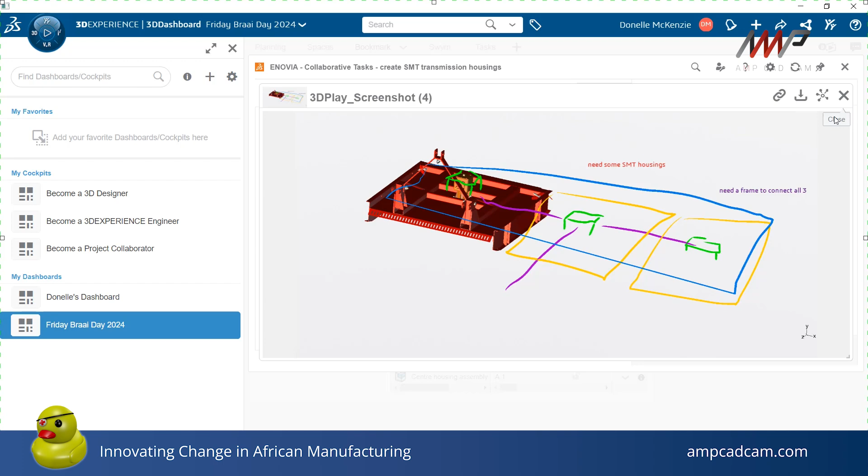Just as Jason drew it, I can see the full image and his little notes that he's attached over there. My job, as specified in the task, is to do the sheet metal housings for each little motor. So I can pop back to SOLIDWORKS then and begin creating the sheet metal that was tasked to me.

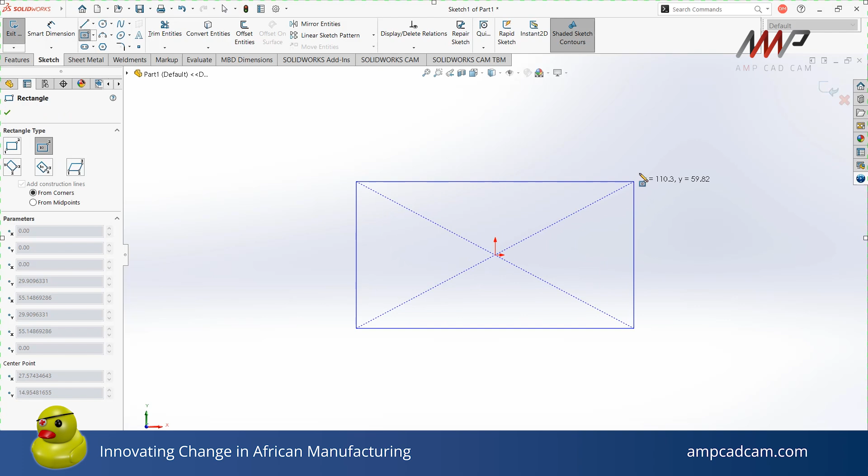So I can begin with a base flange tab. I'm going to do that on the front plane and start with a little rectangle like that, give it some dimensions, and I would like to set the thickness for this. It is already at 1 millimeter, which is what I would like it to be.

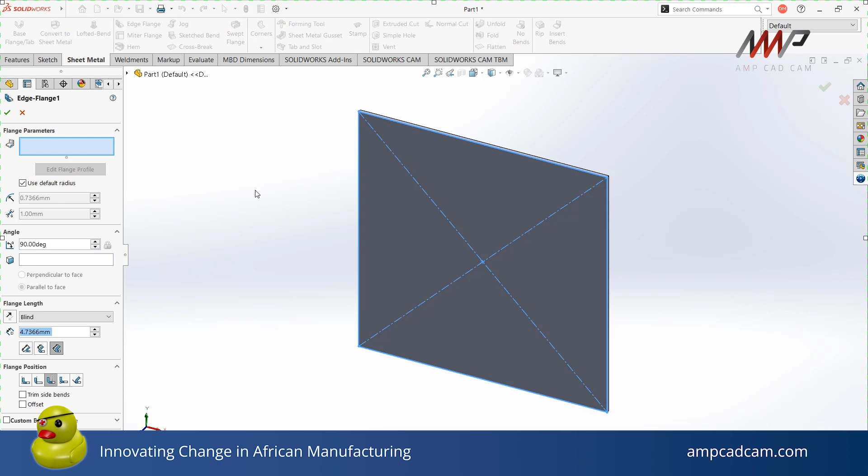Now I can go ahead and add some edge flanges to the base flange. So I go and select the specific edges which I would like those flanges to come off of. 1, 2, 3, 4, like that. Let's give that a specific height, and I am happy with that. I can click OK.

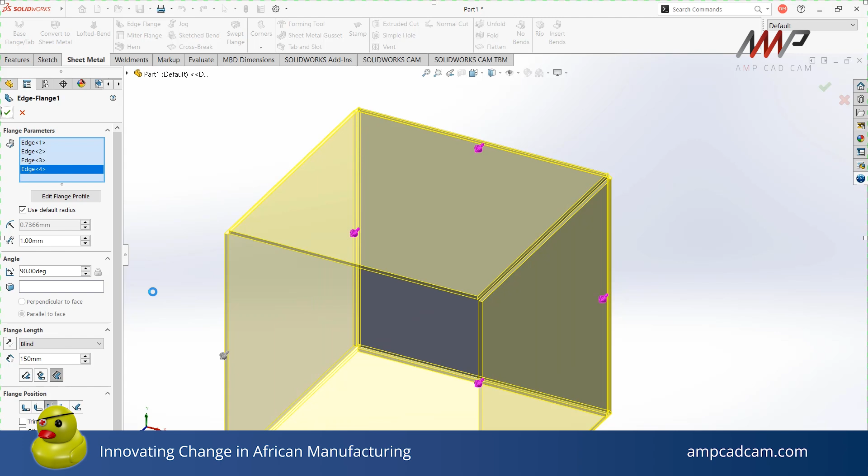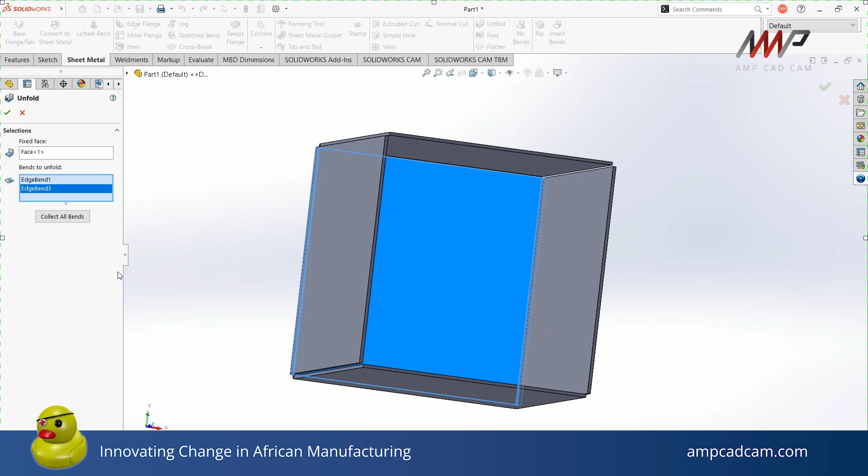So now my box is about halfway there. I just need to do some cuts on the base flange and on the sides of this box. So I will then unfold, select my fixed face and the bends, and unfold those parts that I need to do some cuts on.

I'll create a quick sketch over here. I need a circular cut for the shaft over there.

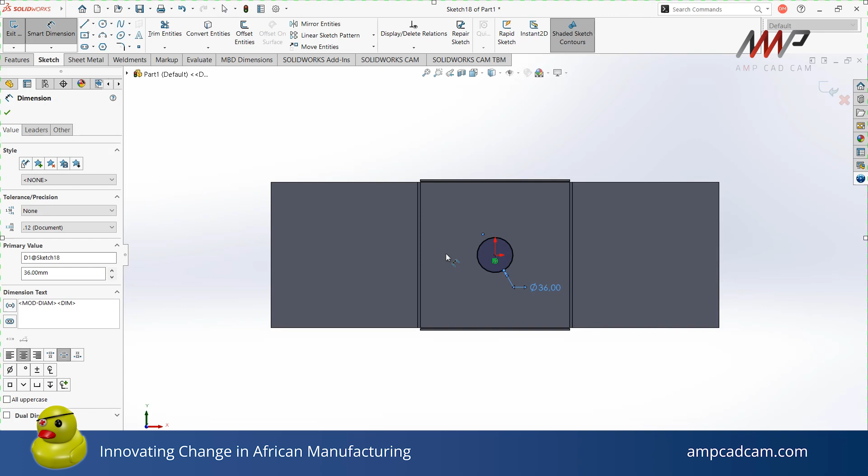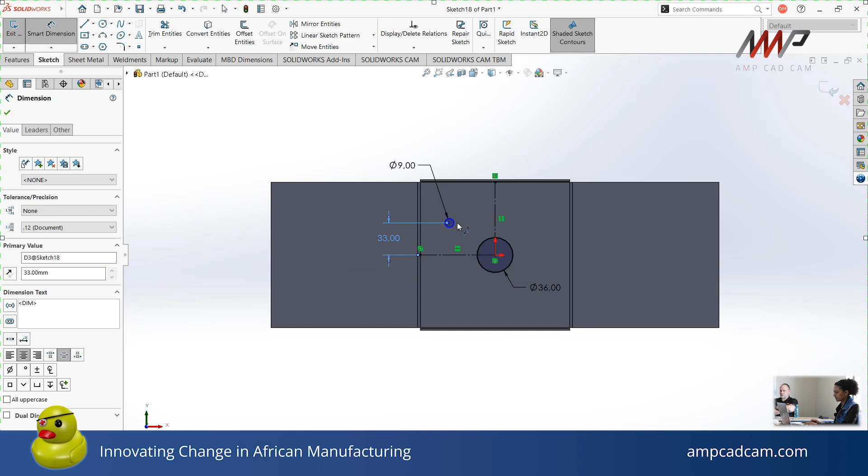So I will be using some diameter 8 bolts. I'm just going to make this slightly bigger and set that to go all around in 4 directions, like that.

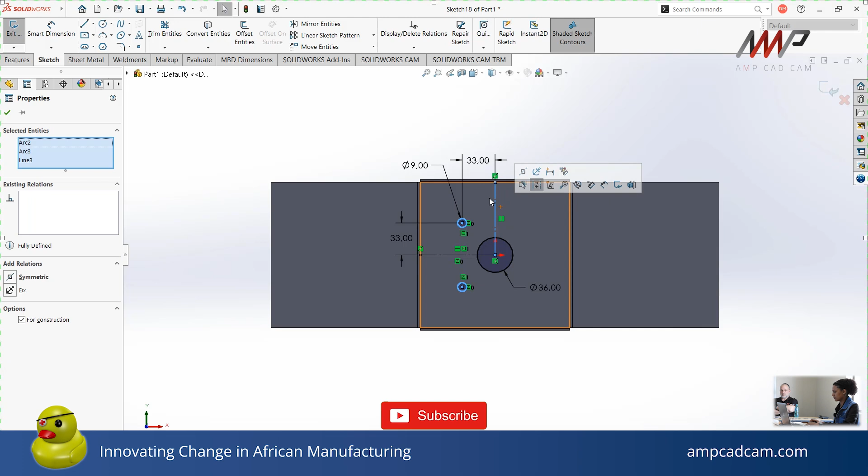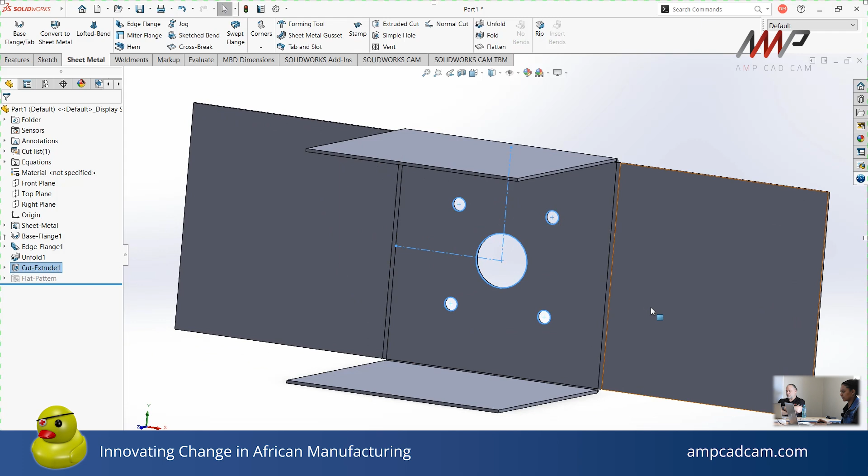And there I have my sketch. So straight from there I can do my cut extrudes, and I will make sure that it is linked to the thickness of the plate, and I can click OK. So this will be the section that will fit directly onto the motor.

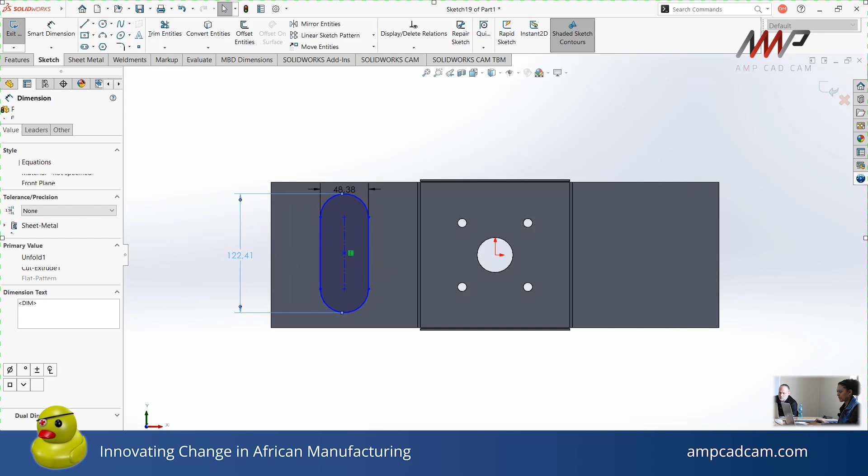On the sides, I would also like to do a sketch for the transmission that will be passed to the sides for the connecting bushes. So I decide I would like to do a straight slot over here just to accommodate the shaft that will be passing through, and let's give it a nice size so that it can accommodate any movement of the shaft in a vertical direction. Let's make that slightly larger than the shaft and just place it nicely over there.

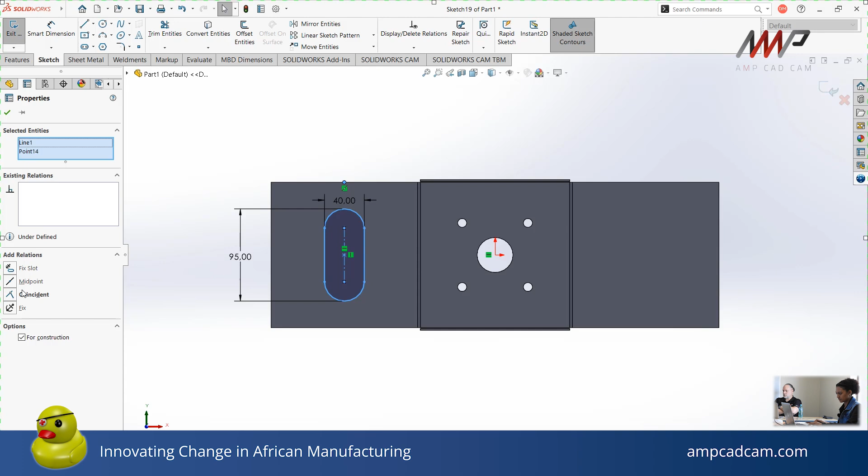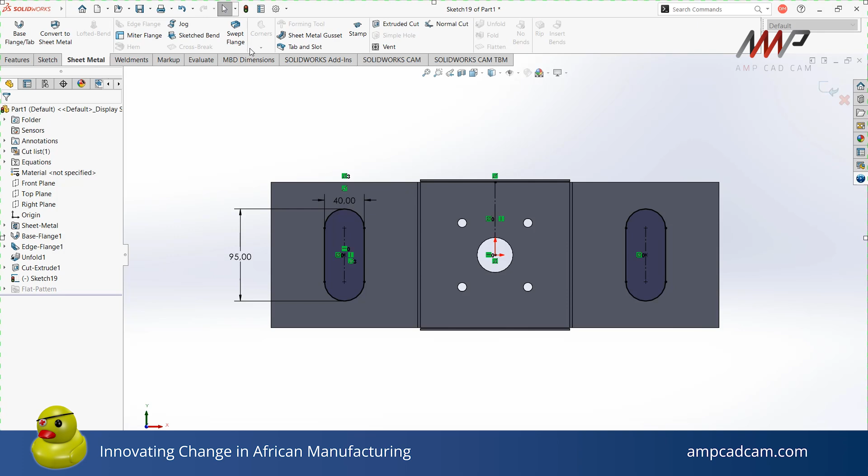There we go. Now I would like this exactly on the other side as well, so I will just mirror that over. There we have it. And I can do my extrude cut. Again, same thing, link it to the thickness of the plate, and there I have my cut.

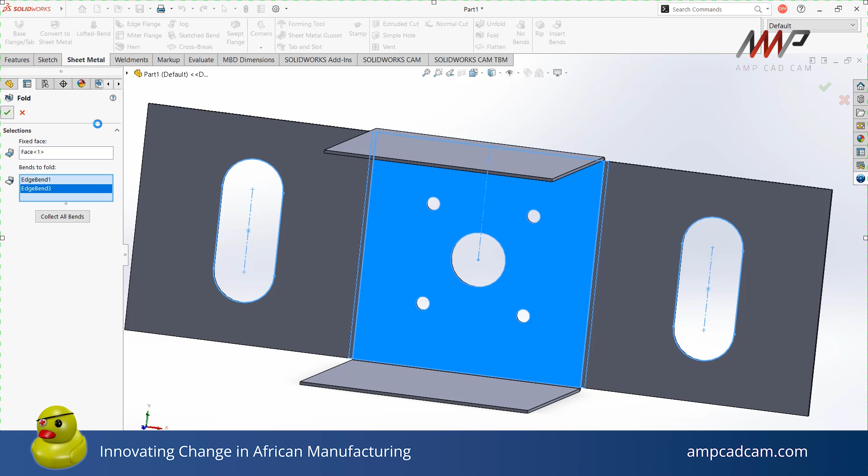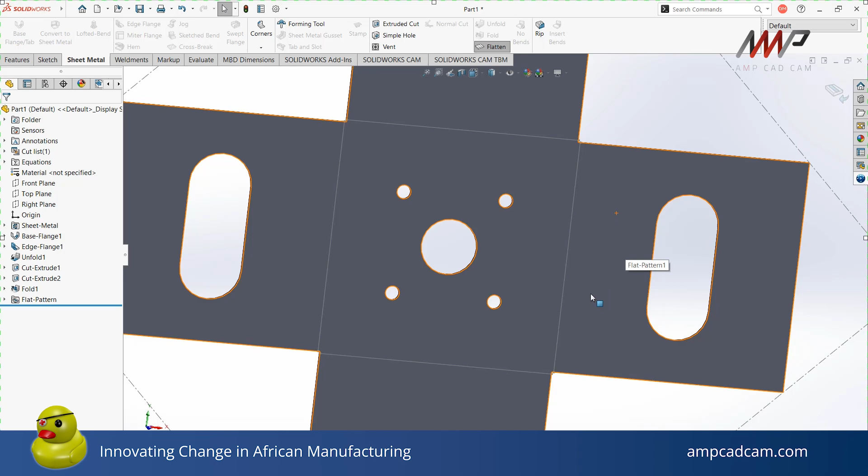Now I would like to fold that back again. And I decide this is going to be cut on the laser cutter. In order to do that, I need a DXF file, so I will flatten my part like this, and immediately I can export it to DXF.

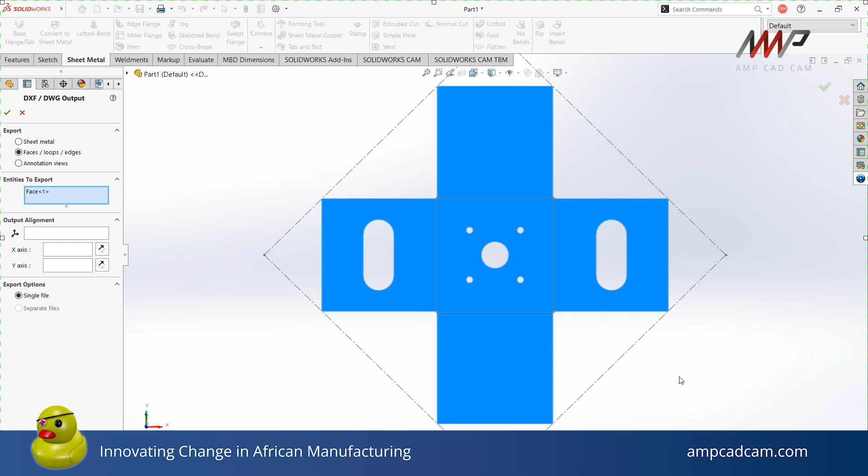I'll save this as sheet metal housing, center sheet metal housing, because I will have ones on the side as well, and save. Once I click on save, there's some settings that I need to add in there. So when I select sheet metal, it will ask me what entities I would like to export. I only want the geometry that I've created, and now I can click OK.

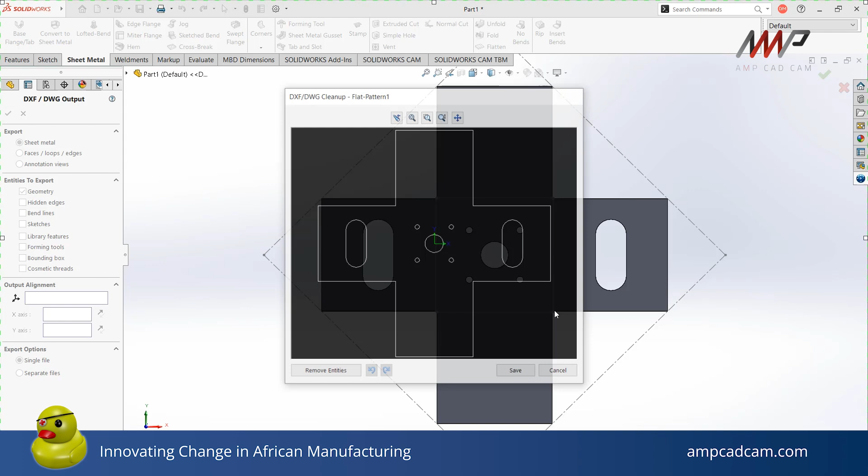Once I click OK, it will give me a small preview of what the DXF file looks like, and it will only be saved once I click on save.

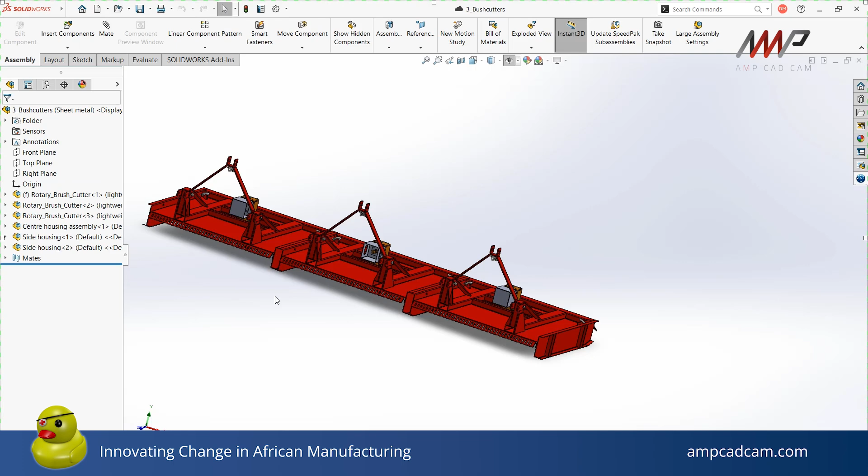So now my little creation is done, and what I will have done after this is to create identical parts, with the only difference being that it now has a front covering and it has the side open for the little side parts, and add a square plate over there just to fortify the space between the housing and the fasteners.

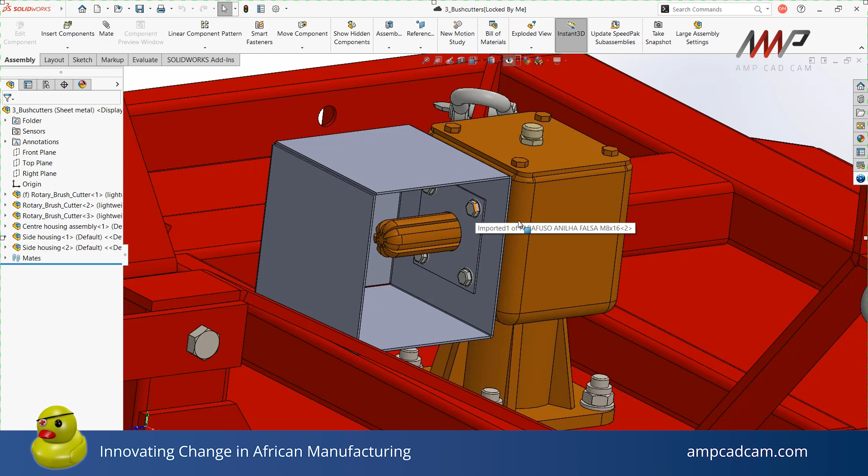Once my task is done, I can go back and save this to the platform, and I can also let Jason know that I have completed my task. So over here, I can do that and save. And it will show on my side that it is completed, and Jason as well should receive a notification that it has been completed.